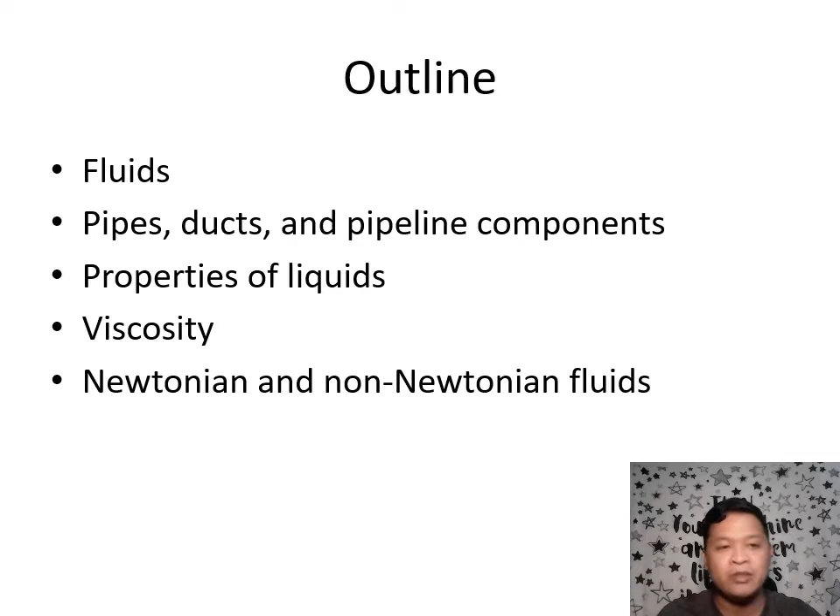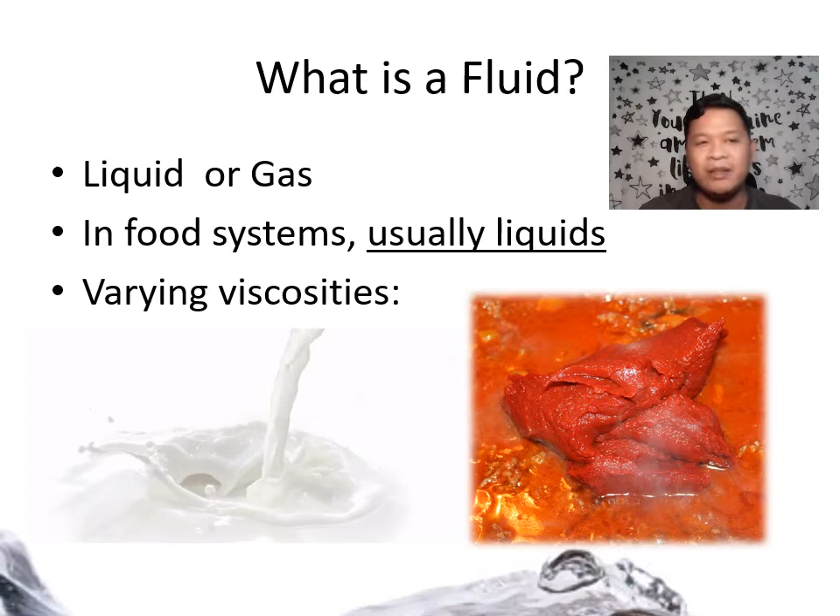Simply put, when we say fluid, it means it's not solid, therefore it could either be a liquid or a gas. But in reality, in food systems, we are usually dealing with liquids, because aside from the steam used to heat food, we don't really consume food in gas form. Maybe the CO2 in soft drinks, or the air in, let's say, ice cream, but that hardly counts.

Most of you are familiar with viscosity, usually expressed in centipoise. So it's poise, not 'poa' again.

In food, we can see that the viscosity varies by a very large order of magnitude, more than 10 to the 5 to be exact. As a reference, water at room temperature is 1 centipoise, milk is slightly thicker, and syrup is already thousands of orders of magnitude away from that. We can go as thick as peanut butter. Later on, we'll discuss what viscosity is.

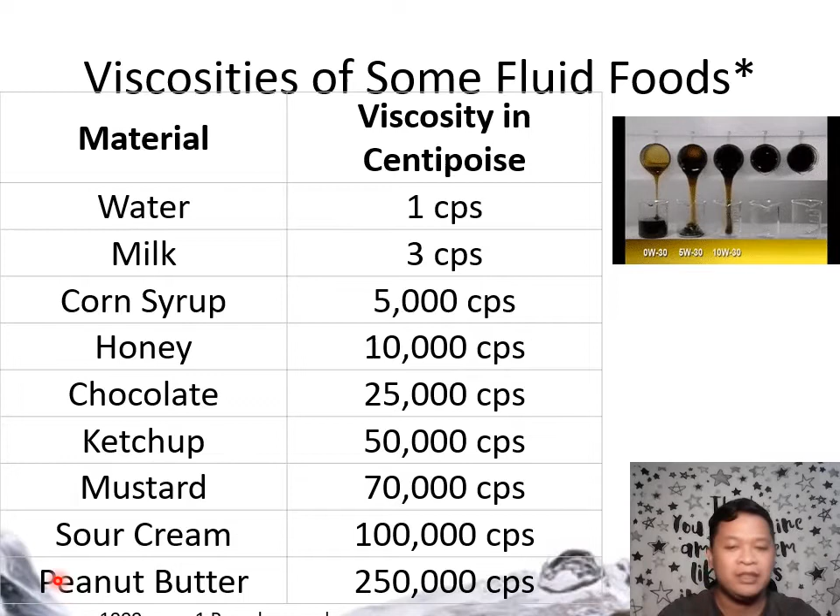In food processing, the fluid could be the product itself, which is usually either a water-based or oil-based food product or juices, etc. It could also be a cleaning agent, as in clean-in-place systems where we usually use diluted acids and alkali and other sanitizers. It could also aid in the transport of solids.

As you may have seen in other videos, fruits are floating down a sort of man-made river in a processing plant. Fluid can also serve as a heating or cooling media, such as the case for steam, hot water, and the cooling brines used to transfer heat away from the foods being cooled and into the refrigeration system, which uses refrigerants, which are also fluids.

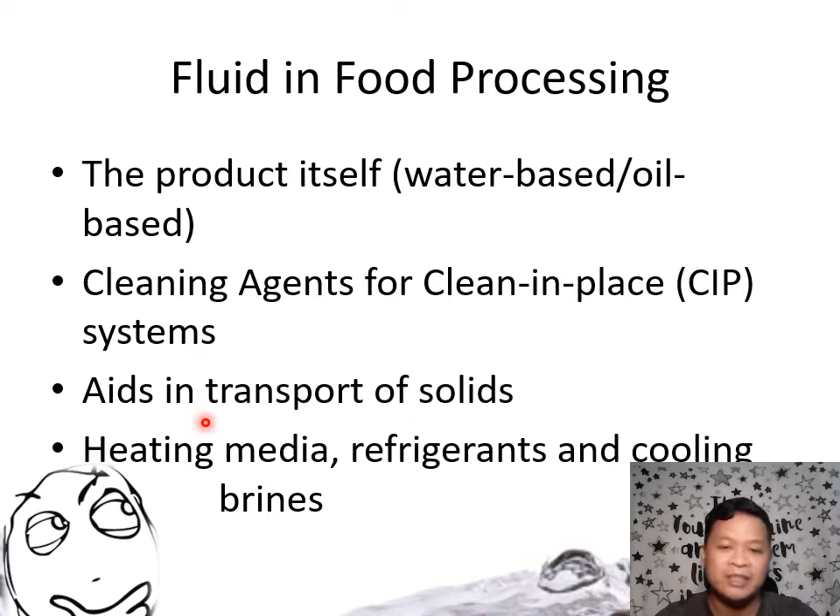If you recall clean-in-place systems, it's like washing dishes, but your dishes are very large. There are four major elements, especially in the removal of soil: the concentration of the cleaning agent, the time and temperature, contact time and temperature of the solution, and the mechanical force.

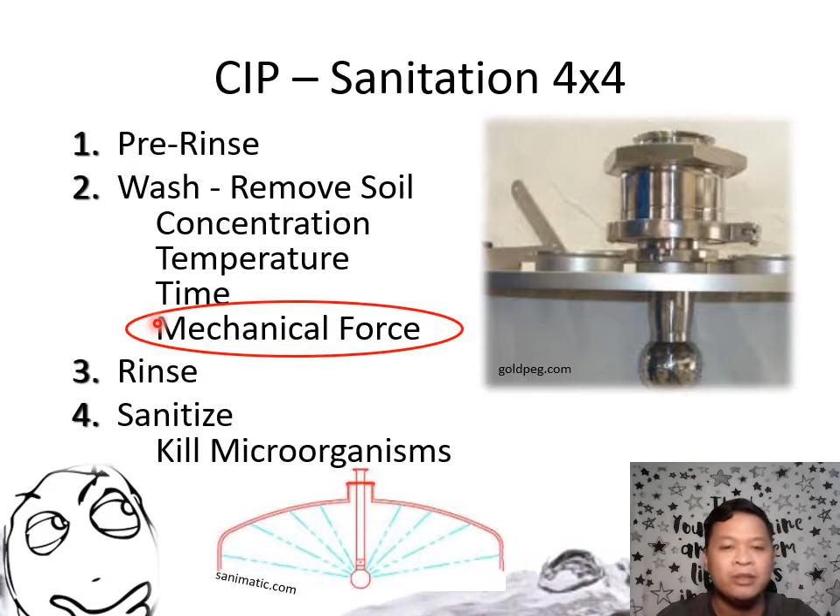Fluid flow has much to do with this mechanical force, which determines how effective the cleaning is, because no matter how high the concentration, temperature, or how long the fluid is in contact, if there's no mechanical force from fluid flow, then your tank won't get clean.

Fluid flows when you apply force to it, through either the use of pressure, gravitational flow, such as when you open a dam, frictional forces, or thermal effects.

Of course, when you heat a food, we know that the molecules move about, and these could create convection currents, among other things.

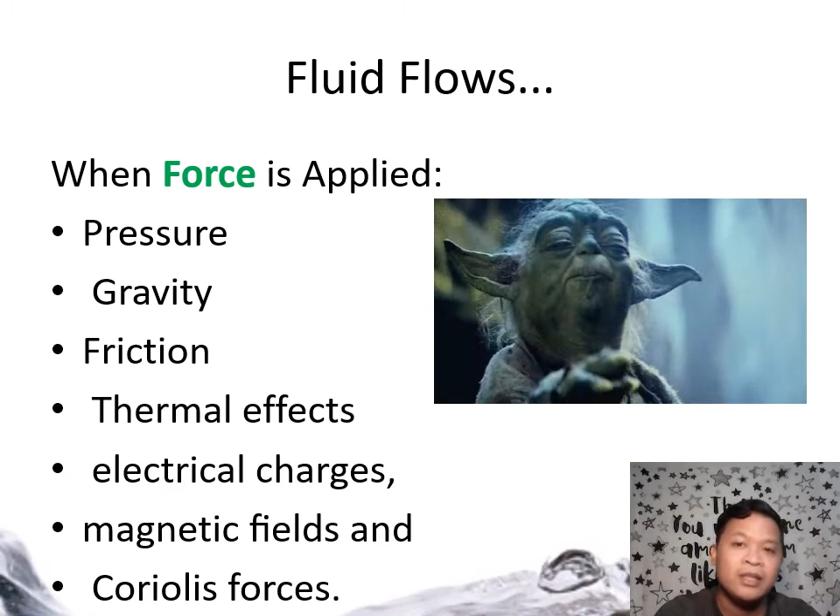Or if you apply electrical charges and the ions in the fluid react to it, and you apply magnetic fields as well, and even Coriolis forces, which are defined as a deflection of moving objects when the motion is described relative to a rotating reference frame, in this case the Earth's rotation.

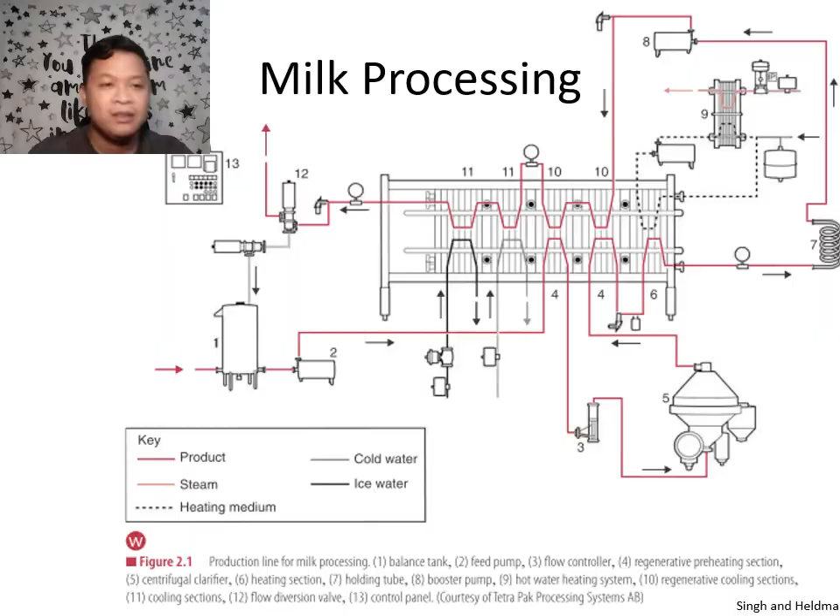Okay, when we're talking about fluids, we usually hear about pipes and ducts. The simple disambiguation is that they're called pipes if they're round, tubular, cylindrical, and ducts if otherwise. Usually ducts have a more rectangular cross-sectional area. And usually pipes are for liquids while ducts are for air mostly, like air ducts in centralized air conditioning systems.

On the other hand, in terms of drainage, you want to avoid open drains for sanitary reasons. So drains are usually covered to a certain extent. They have small holes or even mesh to prevent insect or rodent infiltration.

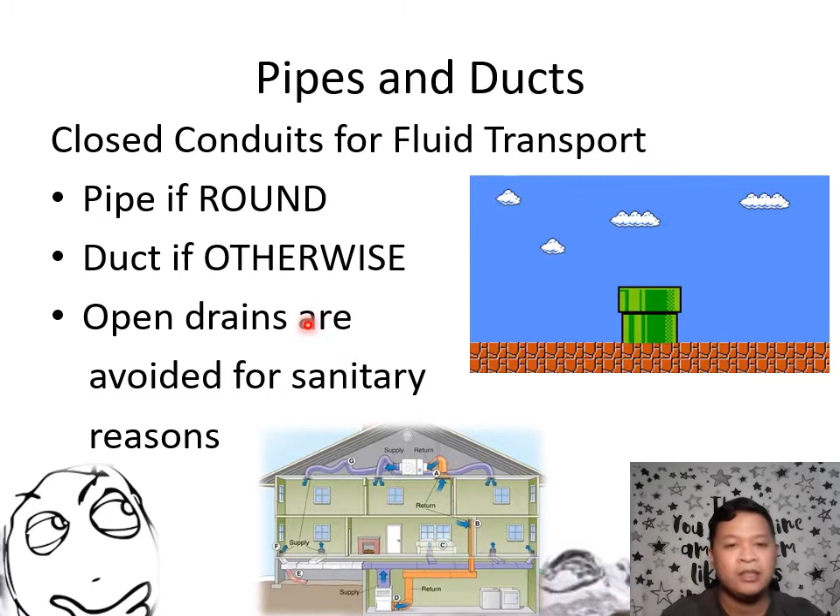So pipes used to transport fluids, especially food contact pipes, usually have a smoothened surface and are made from food grade stainless steel, unless they are only used for heat transfer and are not in direct contact with the food. As discussed in previous accessory topics about passivation, this is the formation of the protective metal oxide coating on the surface when exposed to oxygen or air to prevent corrosion. Passivation is required so that stainless steel surfaces will last longer, especially when exposed to corrosive substances in the food and food cleaning agents.

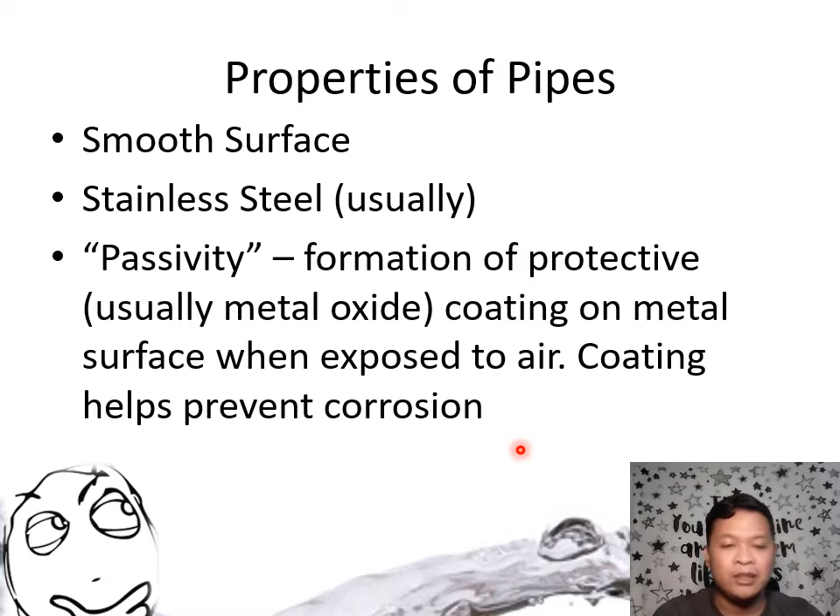Okay, so these are the different basic pipeline components that we have. We need this because when we're going to do fluid flow calculations, we usually have different pipes and other pipe components. So you have your pipe, usually straight, and made of stainless steel as well. You have your tanks, which usually hold liquid food or other liquids used in processing.

Elbow, like a macaroni. So these are pipes that are bent at an angle to change the direction of flow. Usually because of that shape, during fluid flow it causes a bit of frictional losses, because it's slowing down the momentum of the fluid.

You have valves like this one. The purpose of valves is to regulate the flow or open and close the pipe system. This one is what we call a butterfly valve. Don't ask me why it's called butterfly, but basically what you see in the middle is like a coin. When you turn the knob, the coin turns at an angle. So obviously, when the coin faces you and that's the direction of flow of the water, it blocks the flow. But when you open it at 90 degrees, then roughly free flow of the water occurs at its side.

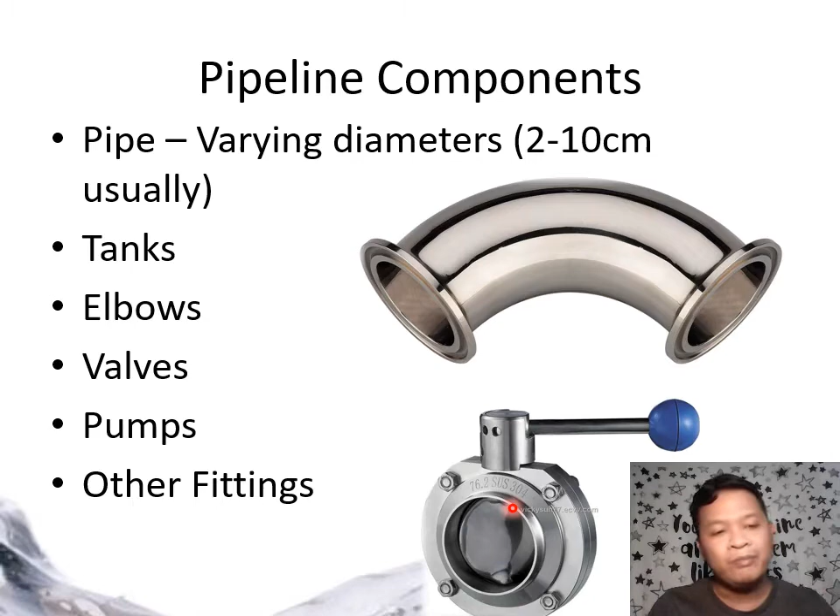So this is a pipe diagram from Singh and Heldman, originally from Toledo's book. As you can see here, these are what we call the nominal sizes. Depending on the type of pipe, we have the Schedule 40 sanitary pipe and the heat exchanger tube 18 gauge.

Usually when we talk about nominal sizes, this is what's being referred to, and they may or may not correspond to the inner or outer diameter. For example, in heat exchanger tubes, the nominal sizes refer to the outer diameters, as well as in sanitary pipes. However, in steel pipes or Schedule 40 pipes, the nominal diameter, as you can see here, for some reason is even less than the internal diameter.

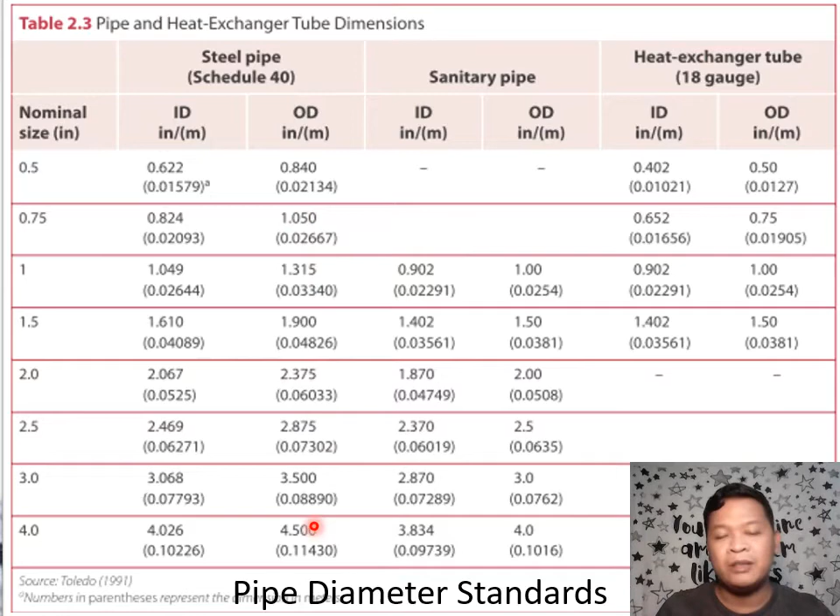So you have to be very careful about this, because when a pipe is mentioned to be of a nominal size, you have to know what type of pipe it is and look at this table to determine what diameter to use. Typically we are interested in the internal diameter because that is where the fluid flows, and for the purposes of calculating the volumetric flow rate, that's what's important. But sometimes when you're doing heat transfer calculations, you want to take into account the outer diameter as well, to be able to compute for the pipe thickness, which is a factor in heat transfer.

So first, let's go to some terminologies. When we talk about fluid flow, it just means that you apply force to the fluid, causing it to deform or flow in a certain direction. Remember that stress from your physics is force over area, similar to pressure. There are two types of stress depending on the direction relative to the surface. For example, normal stress is force being applied perpendicular to a surface, also known as pressure.

However, when force is applied parallel to a surface, it is known as shear force. To illustrate, if I put my palms together with opposing forces, that is normal stress. But when you slide one hand down and the other up, that's shear. If there was a piece of clay in between my hands, in normal stress it gets squeezed, but in shear stress it shears, it's like it cleaves when you do that.

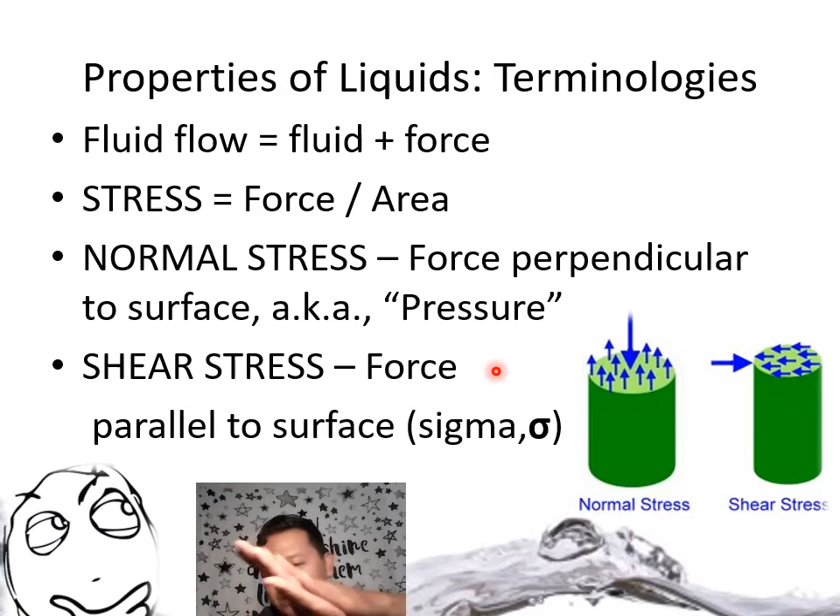So in terms of shear stress and deformation, there are different types of material classifications depending on how they react to the stresses. If you apply shear stress, for example, to an elastic material, it deforms proportional to the stress.

If you have a rubber band, you pull it, and the stronger the force of your pulling, the more the rubber band elongates. But if you let go, it snaps back to its original shape and size. Of course there's a limit to this, because if you apply too much stress, the rubber band will break, or sometimes over time, like the garters in your clothes, they stretch permanently. But normally, an elastic material retains its original shape once the stress is removed.

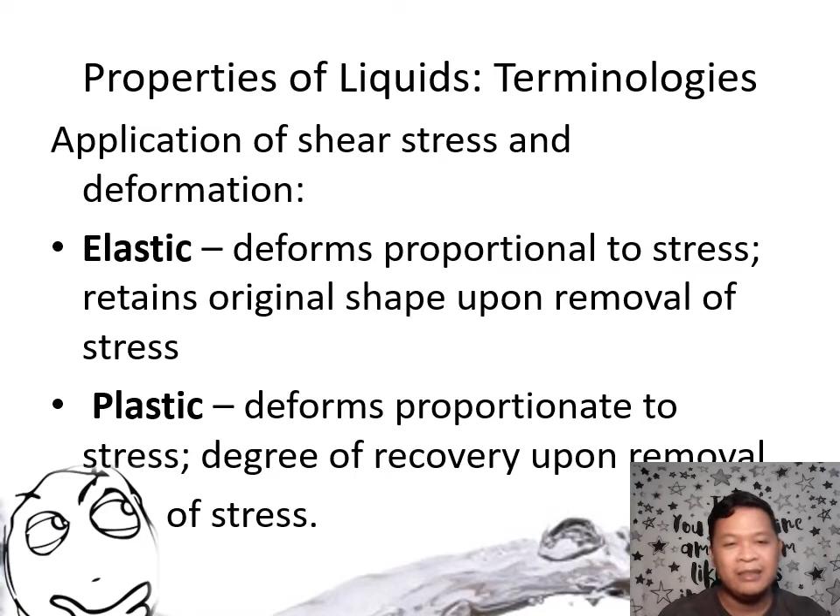But it never recovers even when the stress is removed. That is what makes fluid fluid. For example, water behaves the way it does because there's a constant force being applied to it, which is gravitational force, and that's why it continues to deform into a puddle if you spill it on the floor, and it doesn't take back whatever shape it had. So the deformation is continuous with the application of force, and it becomes permanently deformed. That's why we say liquids have no definite shape.

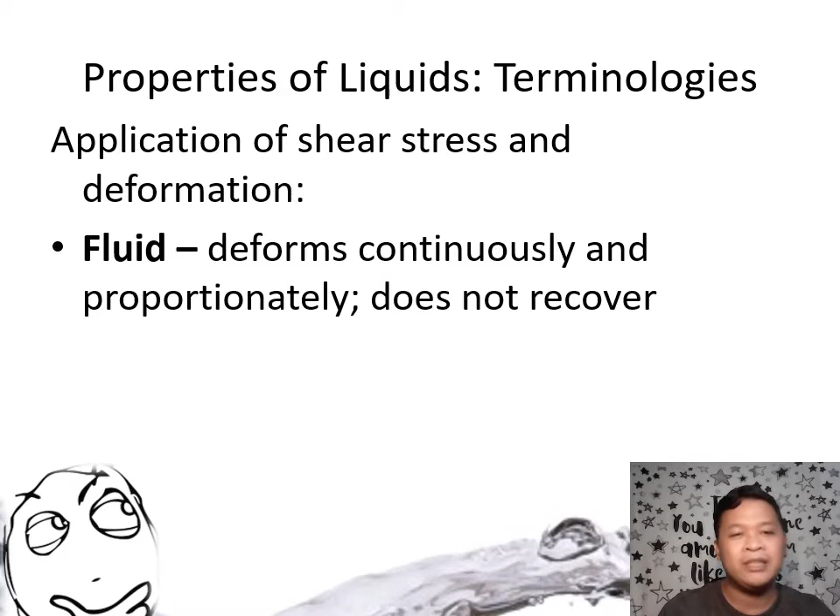Although if you had a glob of liquid in space, where there is no gravitational pull, it would retain a somewhat spherical shape as governed by its surface tension related properties. But that's another story. Just like you may find it hard to find the ideal person, the existence of ideal fluids is also hard to find. Because ideally, like in physics, we have ideal cases like frictionless planes and so on. For ideal fluids, similarly, we want them to have no internal friction, meaning molecules rubbing against each other, the ability to withstand pressure, and no shearing.

However, this is far from ideal, and typically fluids cannot meet these criteria, because those internal forces that resist flow are what we call viscosity. So all fluids have viscosity, even air actually. That is air resistance. So when you're in a vacuum, it's easier to move versus when you're in the atmosphere where there's heavy air.

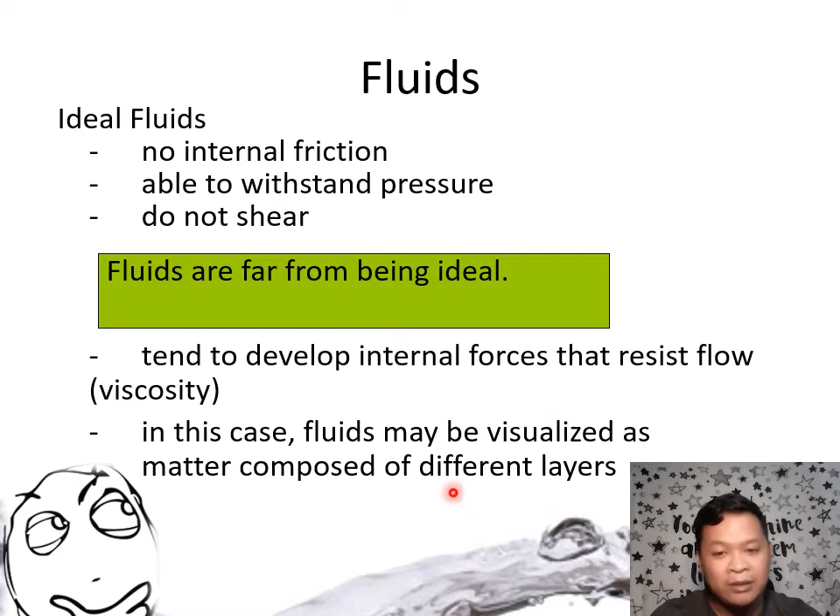One way to look at fluids is to consider them as matter composed of different layers, like a stack of cards. But before that stack of cards idea, I want to discuss another property of liquid, which is density, or mass per unit volume of matter.

In the case of water, it has this peculiarity where its density with respect to temperature peaks somewhere around positive 4 degrees Celsius, and then it tapers off. Although the density differences are very small, it's just a difference of less than 1% within the range of minus 10 to 20 degrees Celsius.

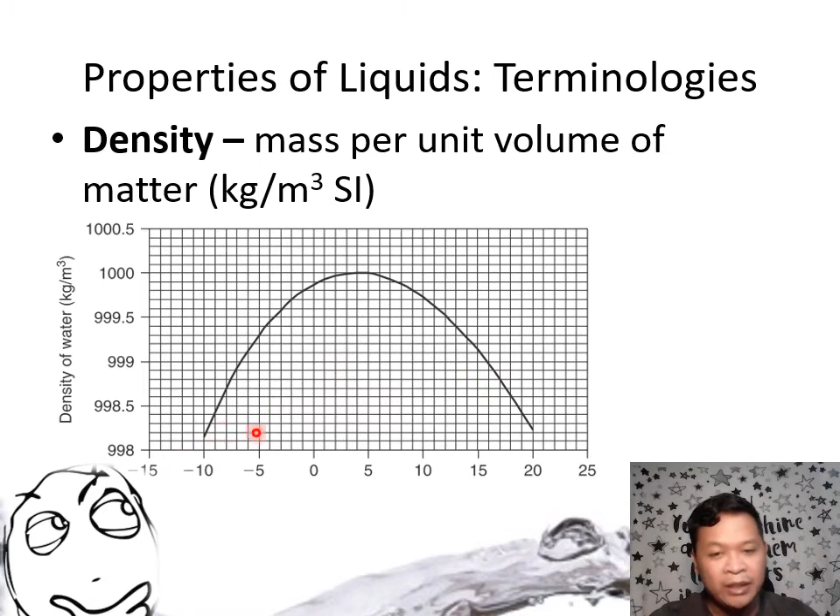Again, viscosity, we've looked at this in food physics for some of you. I don't know if the Physics 70 series also tackled this to a certain extent, but again, it's usually referred to as resistance to flow, or the resistant force against movement or flowing of fluid when shear stress is applied. Since gravitational force is constant and contributes shear stress to our fluid, that's why fluids flow in the direction of the ground when nothing is blocking them.

This viscosity is what causes it to slow down. If you imagine liquid as a stack of cards, each of those cards rub against each other and provide a certain level of stopping power and friction, such that when you push along the plane, the card on top moves faster, because they all start at the same position, but the top card moves farther while the card at the bottom barely moves at all. That's the effect of friction, or its viscosity.

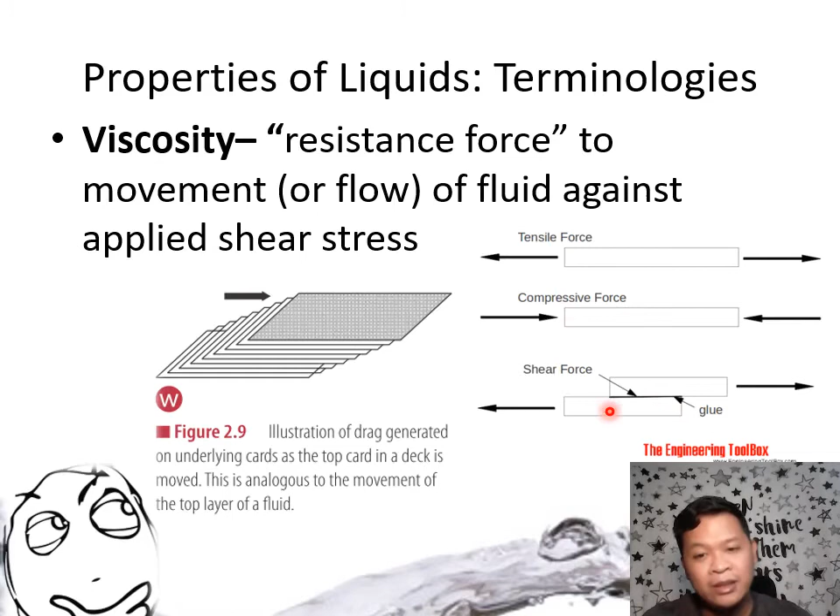So again, this is just to look at the different forces. The normal stress could either be tensile or compressive depending on the direction. Tensile is pulling, compressive is pressing, like pinching it.

Shear force is in opposing directions, but you're shearing along that plane. So the way to understand viscosity is like this: you have a stack of cards, with an uppermost and lower part. Then you apply a force in this direction. The stack of cards has a height z, or a distance between A and B, and there's a constant cross-sectional area. VA is the relative velocity resulting from the application of that constant force.

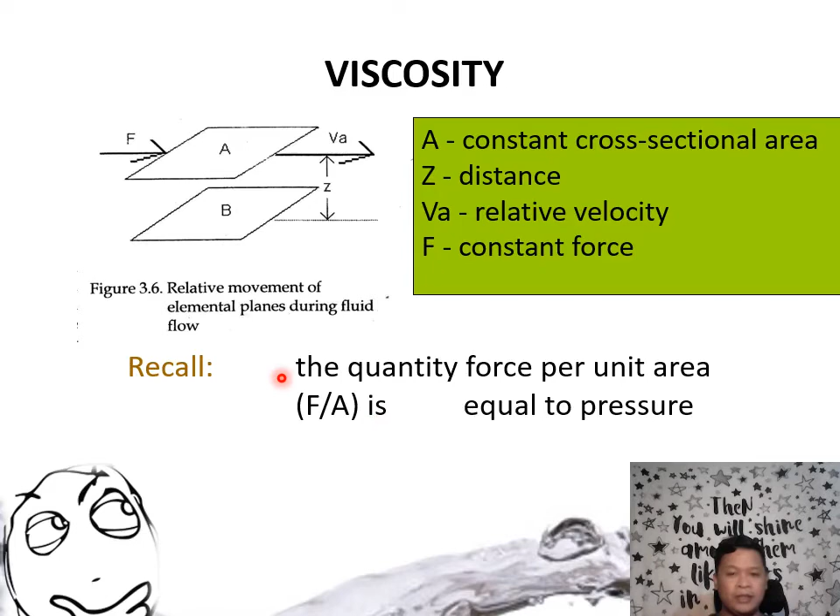So the quantity force per unit area, as you can recall, is similar to the units and dimensions for pressure, right?

So you could either imagine this to be a deck of cards situation, or in this case, water flowing inside the pipe, wherein this is the pipe wall, and this, for example, is the center of the pipe. Of course, the other end of the pipe wall would be up here, since it's circular, radially around.

The fluid immediately in contact with the pipe wall or the solid has a non-slip condition, therefore it has a velocity of 0. And the surface is stagnant, or not moving.

We could see here that if this is your fluid, there's what we call a velocity gradient, wherein the part of the liquid that is in the very center of the pipe travels the fastest, and it gets slower and slower until you come to that last molecule sheet directly in contact with the pipe wall, where it has a velocity of 0. So of course, the more viscous a product is, the bigger the difference between the velocity at the center versus near the wall.

Because of the internal friction among the molecules of your fluid.

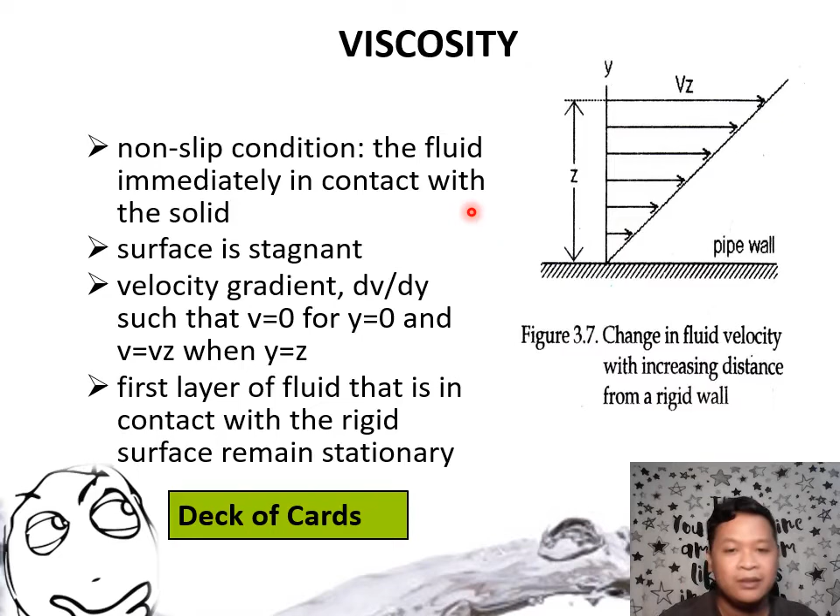So the velocity profile is thus the rate of shear, or the change in velocity of the fluid with respect to how far it is from the surface—change in velocity over change in distance. So it's like rise over run, like a slope, and when you make a line from that slope, then you would have the velocity profile, which is related to the viscosity.

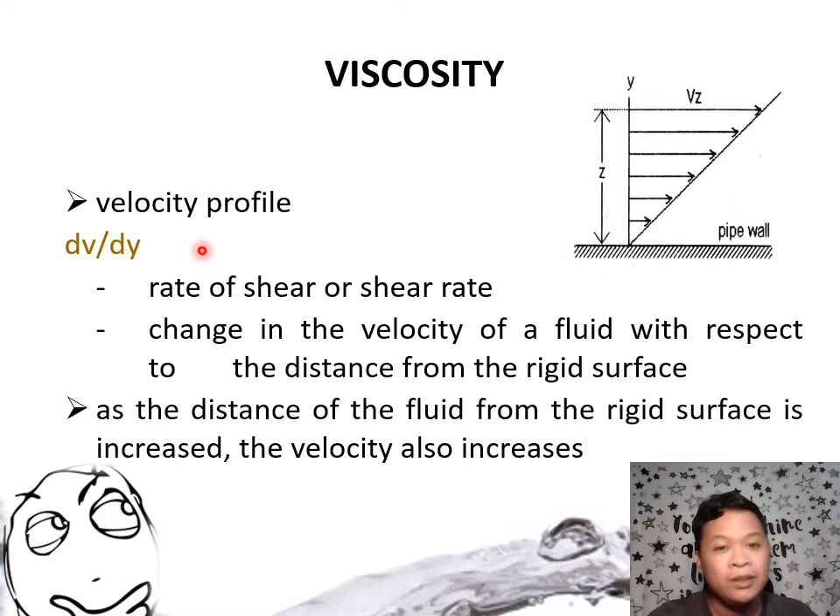So viscosity thus represents the numerical relationship between the applied shear stress and the shear rate, or how much force over how much the fluid moves. And this is now your velocity profile.

You have here your shear stress given by tau, sometimes denoted as sigma, and the shearing rate is the change in velocity over change in distance from the pipe wall. And so you see, they are related by mu. And this mu is now your proportionality constant, or the viscosity of the substance.

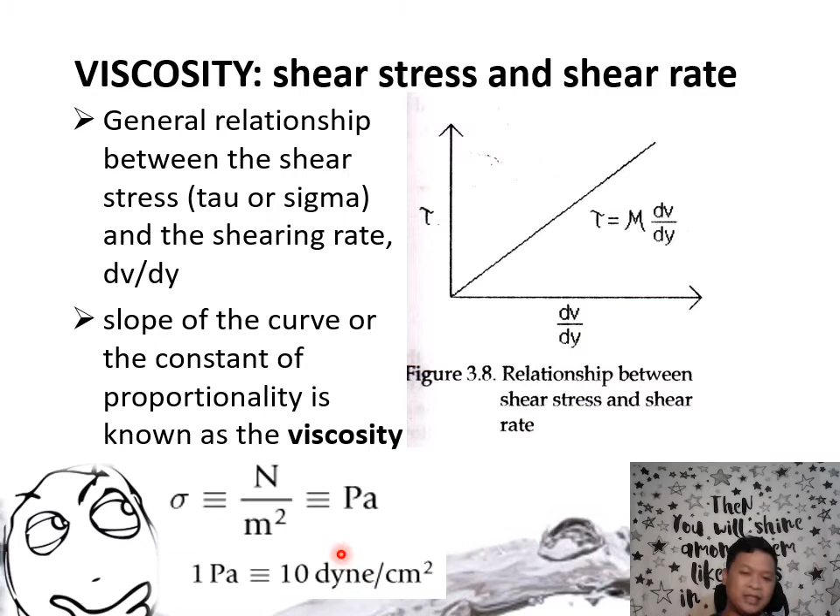So the unit for tau or sigma is in pascals. And we know that this is a unit of pressure, and pressure has a lot of different units, like psi, or usually kilopascal, psi, bar, and so on.

So that mu, typically called viscosity, is actually the dynamic viscosity, which is not to be confused with kinematic viscosity. But normally, when unqualified, we say viscosity, that refers to mu, or the dynamic viscosity. So if you were to rearrange mu on the other side and then do your balancing of units and dimensions, you would find the SI unit for viscosity to be the Pascal second.

And again, the typical unit that we use is centipoise, and the conversion factor for that is 1 Pascal second equals 1000 centipoise.

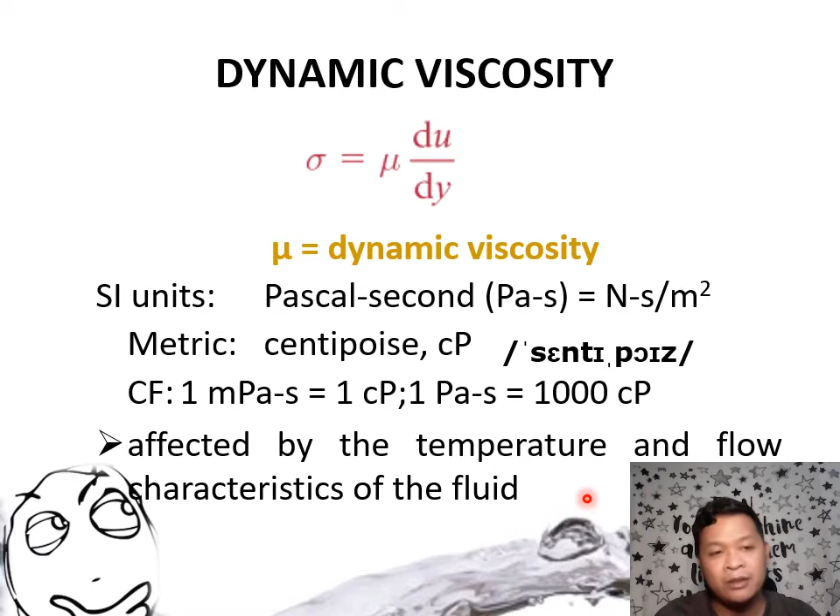We should take note that the viscosity of the fluid is affected by temperature, because as we know, the density changes with the temperature of the fluid. So whenever we do viscosity measurements, we should take note of the temperature at which that measurement was taken. And of course, when using very specific equipment, we want to note the settings for that equipment—let's say if it's a viscometer, the spindle number, the RPM, and even when we took the viscosity reading.

On the other hand, kinematic viscosity is simply dynamic viscosity divided by its density. Although we rarely use this, it's good to know. Its SI unit is meter squared per second, and they usually use the Stokes, where 1 centistoke is 1 millimeter squared per second.

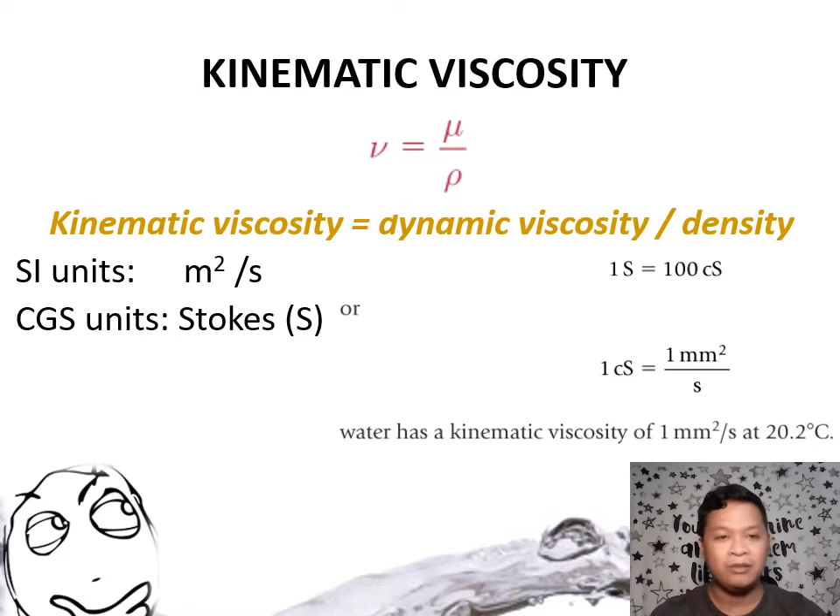Earlier I showed you a chart of viscosities of different food products. As a rule of thumb, 1 centipoise is the viscosity of water at ambient temperature. Thick products like honeys and syrups have around close to 10,000 CP, like honey is 8800. Generally, the human eye can distinguish viscosity differences between 100 and 10,000 CP. So other than that, for liquids as thin as water, you can't distinguish which is more dilute, and for very thick products, you can't visually tell which is more viscous.

Of course, this is determined when you pour the product and visually see the difference in the velocity, and the tailing of the product that forms a long strand of goo before falling, instead of falling in drops or as a very fluid motion.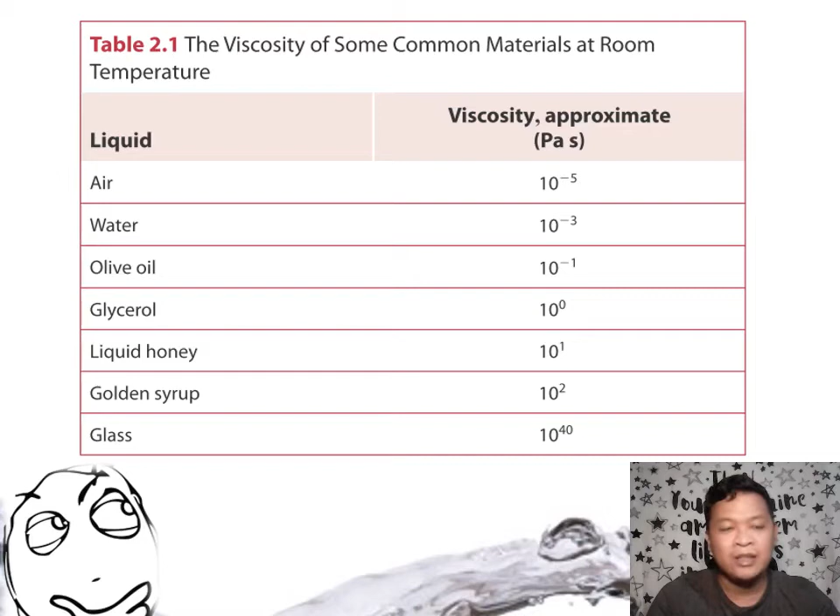And then glass is actually a very viscous substance that is, for all intents and purposes, treated as a solid, but generally you'd expect glass to deform over time. But how long that time will be, we're looking at thousands of years or maybe even more. So in our lifespan as humans, we won't notice the deformation of a glass.

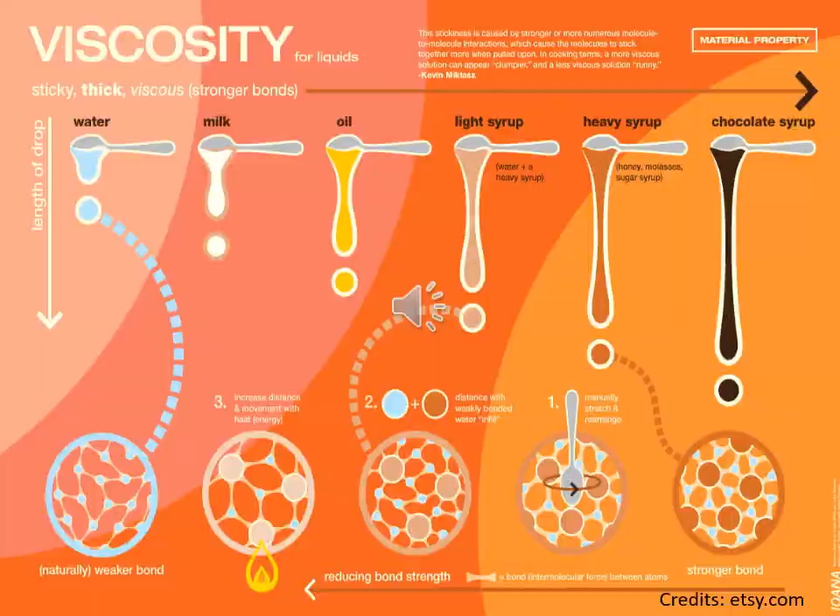So we measure this viscosity typically through the use of capillary tubes or a rotational viscometer. I think you've encountered both, either in your chem food physics class or maybe in a food analysis class.

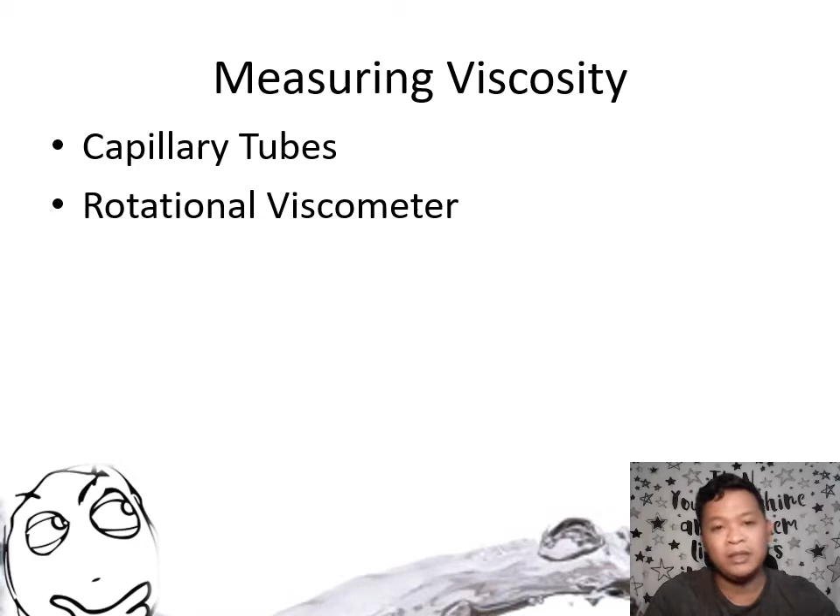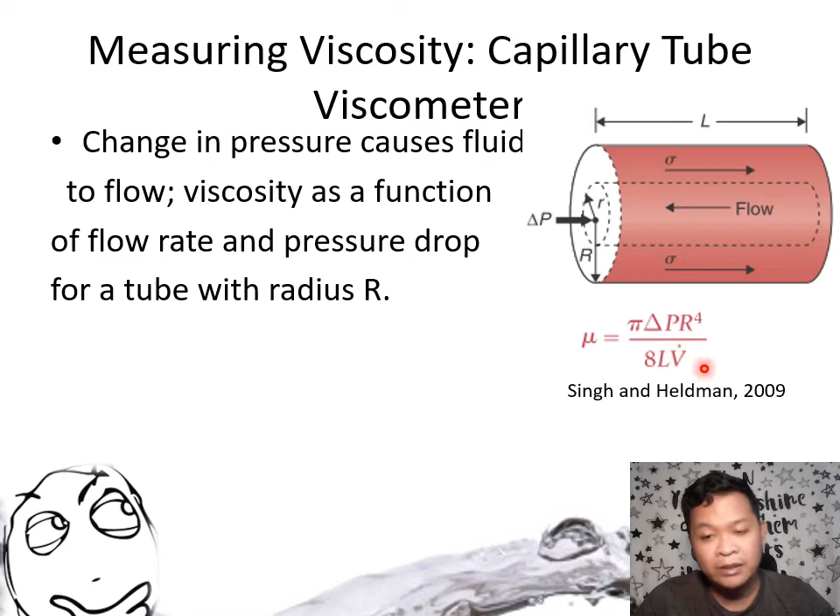So in the capillary tube, what we do here is there is a change in pressure that causes the fluid to flow. When it's upright, it's gravity, and viscosity is computed as a function of the flow rate and the pressure drop for a tube with a defined radius r. So the viscosity equation here is given by mu equals pi delta p r raised to the 4 over 8 L times v-dot, where v-dot is the volumetric flow rate.

That volumetric flow rate is defined as the bulb volume over the discharge time. So in this case, you have a bulb with a fixed volume. When you fill it, you wait for all the contents of that bulb with the fixed volume to go down through the capillary, and you measure the discharge time, and of course you know the radius of your capillary. Then you can calculate the pressure drop and the length of the tube to finally get your viscosity.

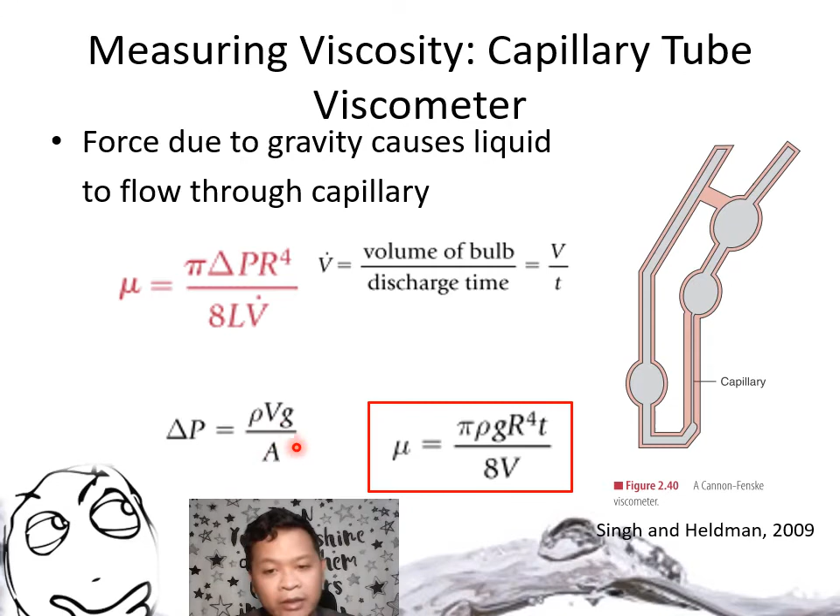So the pressure drop is given by the density of the fluid multiplied by the bulb volume, acceleration due to gravity, over the cross-sectional area. You can try solving this sample problem from Singh and Heldman on your own to provide some practice calculations for the lab. Simply put, using this equation and the givens, you can calculate for the viscosity. Take note that for each run you will calculate a different viscosity value, and of course you can just average that or see how much the measured viscosities differ per trial.

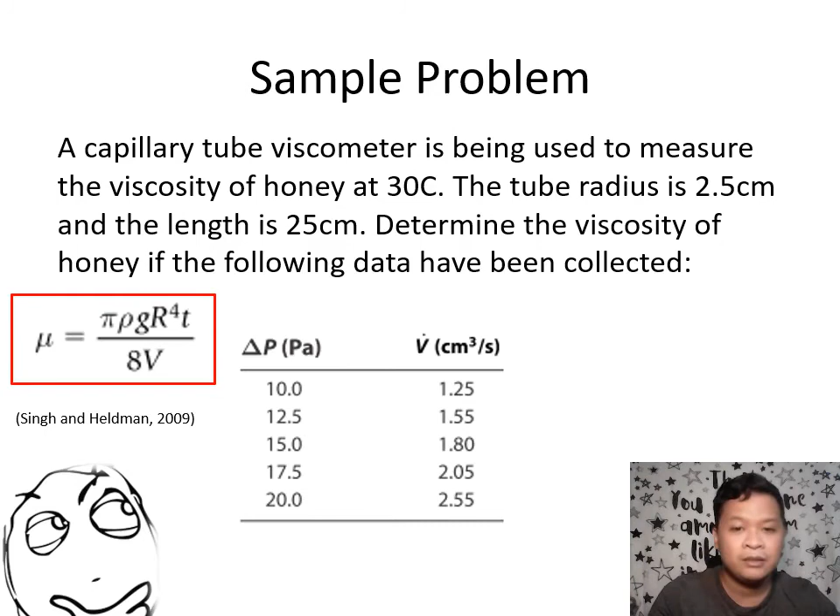So the Brookfield viscometer we have in the lab is a form of rotational viscometer. How this works is that the viscometer is actually an instrument that can measure rotational force, or torque, required to turn the cylinder at a certain RPM. For those of you who haven't used the viscometer, here's how it works: there is a cylinder that you dip into the fluid you want to measure.

You submerge it completely, and then you set the viscometer. You choose the cylinder or spindle. Then you input that into the machine. Let's say I choose spindle number 1. I screw it into the machine, and then I input that spindle number 1 is selected. Then I choose how many RPM I want the viscometer to rotate at. Then I spin it.

While it rotates, it reads the current amount of torque being used, and then converts that through computation into a viscosity value. So when the torque changes, the reported viscosity also changes. And generally, we take the viscosity reading after a few seconds of the viscometer spinning, depending on our test protocol.

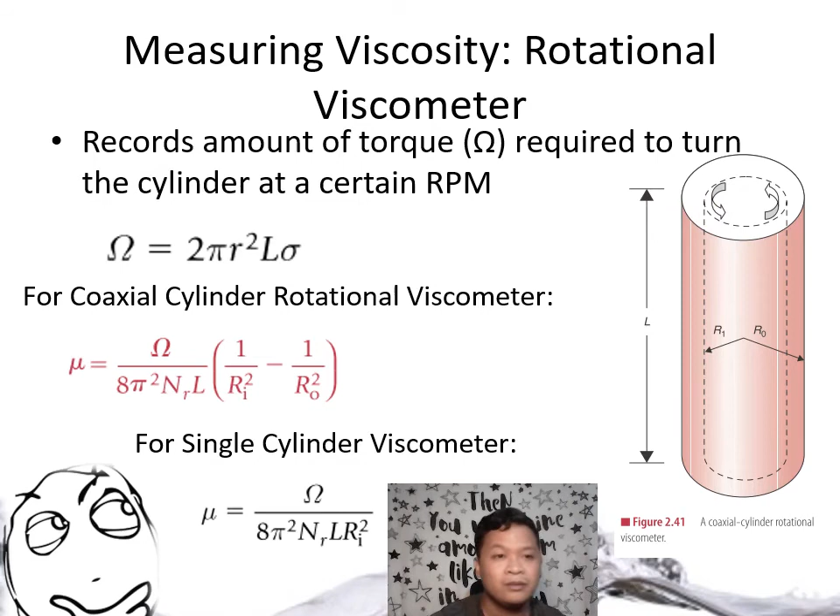One good way to visualize this is when you're using a rotational viscometer, may resistance kapag may motion, let's say air and water are both fluids. If you've tried cycling in air versus cycling in water, you know there's a difference because water is more viscous, or simply walking, wading in the pool with your feet submerged, may resistance, and you can measure that through your body, na parang mas mabigat yung resistance sa tubig pag naglalakad ako. So parang ganun lang yung viscometer in a nutshell.

But of course, in a cylindrical viscometer, we assume that the cylinder doesn't add a dragging force that could affect the measurement. While it may be true for Newtonian fluids, it's not necessarily true for non-Newtonian fluids. So we have to be careful about the assumption, or in using rotational viscometers for non-Newtonian fluids.

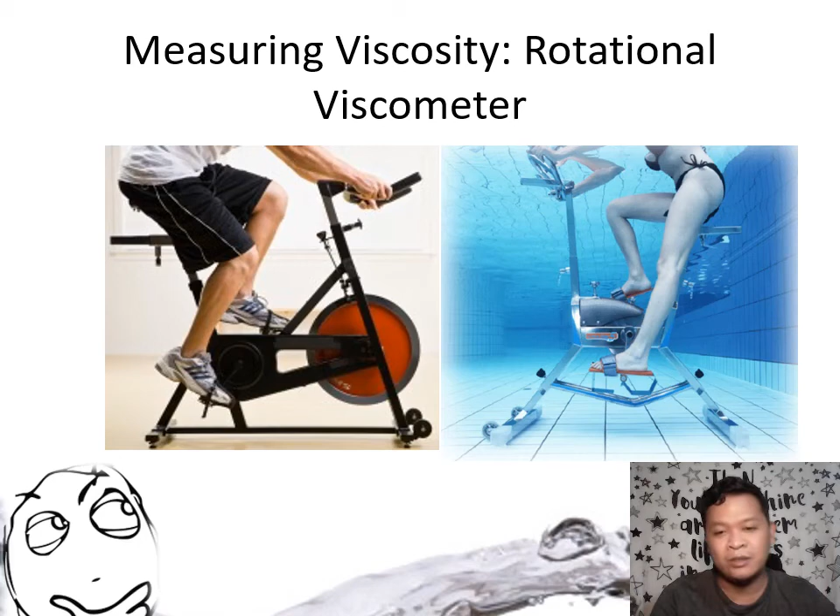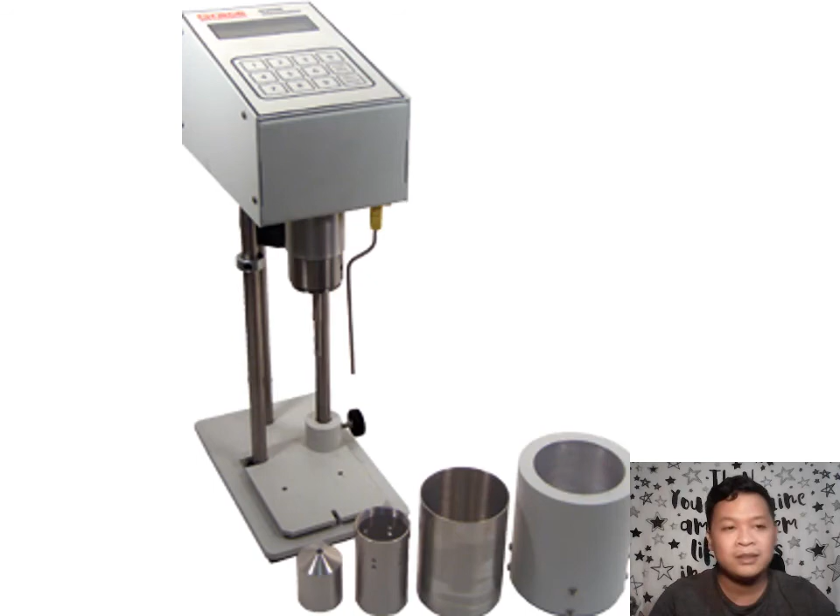So ito yung example ng cylinders na may inner and outer radius, so hollow sila. Similarly, you could try out this sample problem from Singh and Heldman for single cylinder rotational viscometers.

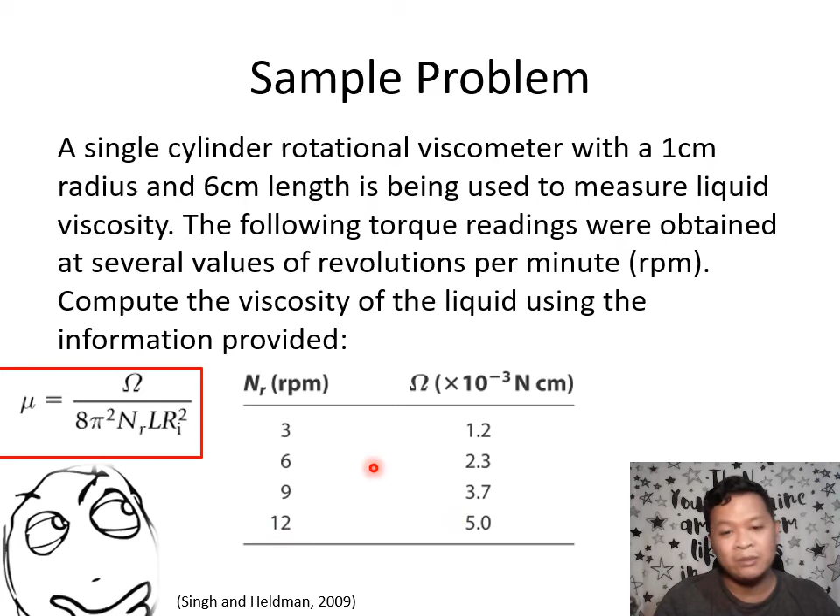Take note that the NR here is in RPM, but if you look at the units na ginagamit dito, obviously you want to convert this into per second, kasi kung per minute yan, hindi magka-cancel out yung mga units mo. So be careful about that. Make sure that when you write it, yung units ay pinapakita niyong nagka-cancel out, kasi kung numbers lang, magkamali kayo.

So again, you want to differentiate between Newtonian and non-Newtonian fluids. When you have a Newtonian fluid, there is an immediate and proportional increase in shear rate when shear stress is applied. So parang straight line yung kanyang shear stress versus shear rate curve. Ang tanong lang is kung paganon ba siya. And then, as we know, yung viscosity is the slope, di ba?

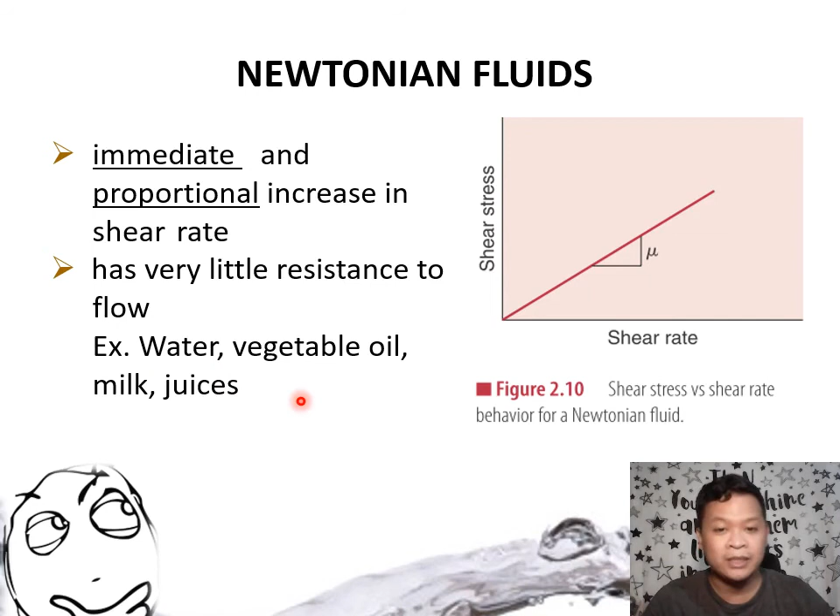Generally, those we consider to exhibit Newtonian behavior are water, vegetable oils, milk, and juices - yung mga karamihan ng medyo low viscosity nating mga kaibigan. On the other hand, kapag mas complex yung systems, especially yung liquids containing dissolved or suspended solids, non-Newtonian na yung behavior nila.

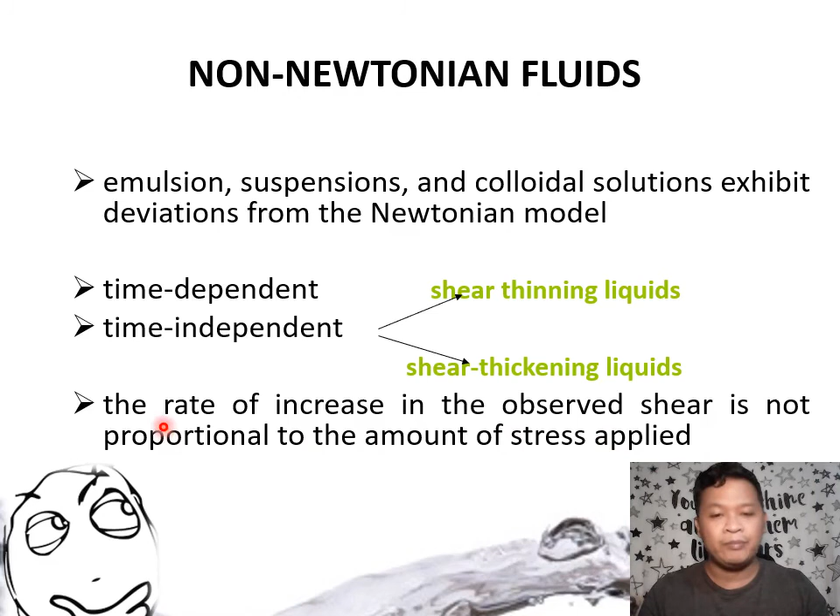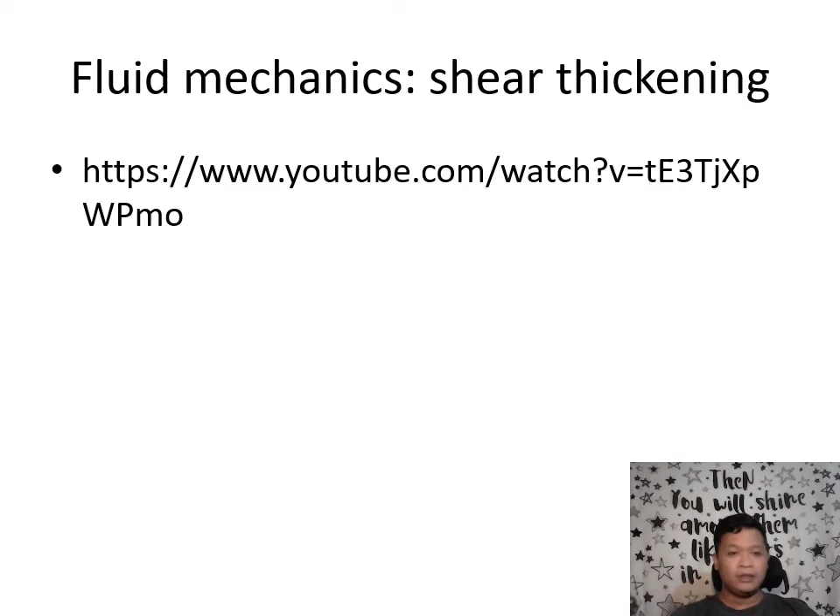Maraming klase ng non-Newtonian fluids. Of course, the two major ones are the shear thinning and shear thickening. Parang hindi straight line yung nagiging graph niya kapag ginraph natin yung shear stress at shear rate. So you can learn and watch this YouTube video on shear thickening, and then this one on shear thinning.

For those two, shear thinning or pseudoplastics - based on the name, as shear rate increases, the viscosity decreases. So pag hinahalo mo siya, lumalabnaw siya. These are also called pseudoplastics. Examples are condensed milk, fruit purees, mayonnaise, mustard, and vegetable soups.

On the other hand, there are shear thickening liquids, wherein viscosity increases with increasing shear rate, such as cornstarch in water. Yung nakita nyo na kapag cornstarch in water suspension at a high concentration, pag inapakan mo siya, seemingly solid. So shear thickening liquids have applications outside food.

Actually, meron nga parang ginawa sila bulletproof vest. Kapag pinukpok mo lang ng daliri mo, parang ang lambot niya, ganon. Pero kapag yung instantaneous force ng isang bala na tumatama dun sa object, parang bigla siyang magiging super viscous na kaya niyang pigilan yung bala from penetrating. Pero otherwise, hindi naman siya talaga rigid na material.

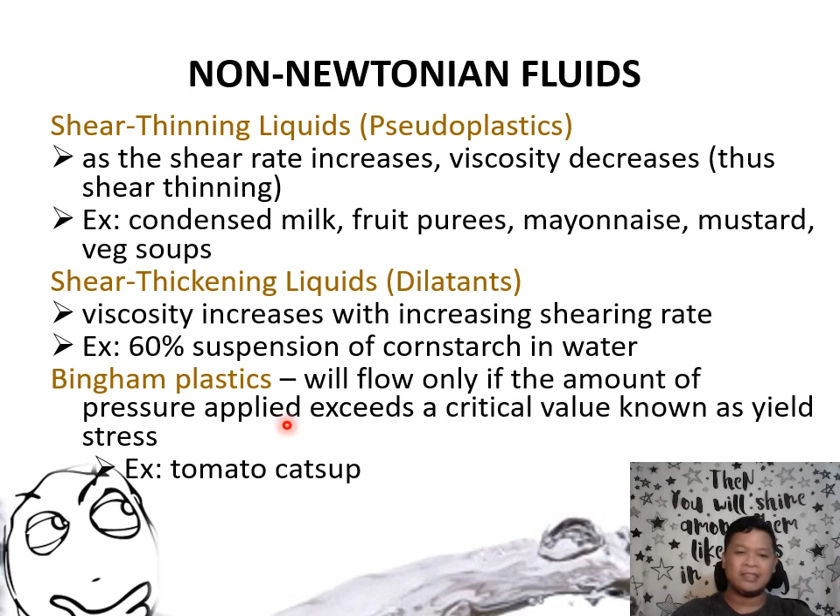Then we also have Bingham plastics, which has a yield stress - plastics that will only flow if a yield stress is exceeded. Di ba yung tomato ketchup na pag kahit baliktarin mo yung bote ng ketchup, hindi yan malalaglag kahit mag-flow man lang ng sobrang bagal. Suspended animation siya talaga. Pero pag tinaktak mo ng malakas, pag sakto yung taktak mo dun sa yield stress niya, bigla na lang laglag siya. So yun ang Bingham plastics.

However, even among Bingham plastics, you could have mixed types wherein Bingham siya, but also displays shear thickening properties or displays shear thinning properties.